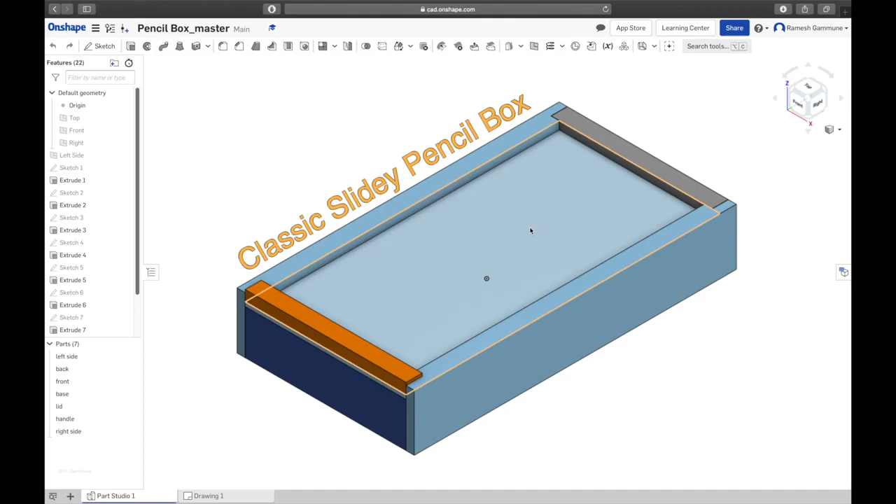In this series we're going to look at making the classic pencil box. It's a bit more advanced than the ones we did before, but still fairly simple. You're going to learn two key new functions: first, how to create an offset plane, as you can see this plane's not at the origin, and second, how to mirror a part. So we've made this once and mirrored it along the origin. That's the main difference, and those are the two key things you'll learn in this tutorial.

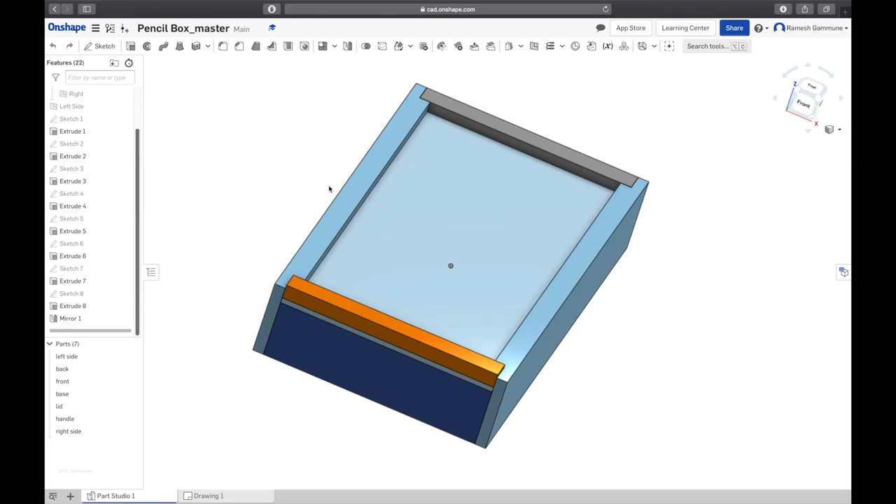You'll also learn how to add new parts, because before we've just been adding features to existing parts. You'll also learn how to do a more complex set of drawings. As you can see here, this is what we're going to end up with. It's actually going to have two pages: page 1 is a complete pencil box, then page 2 is a part breakdown.

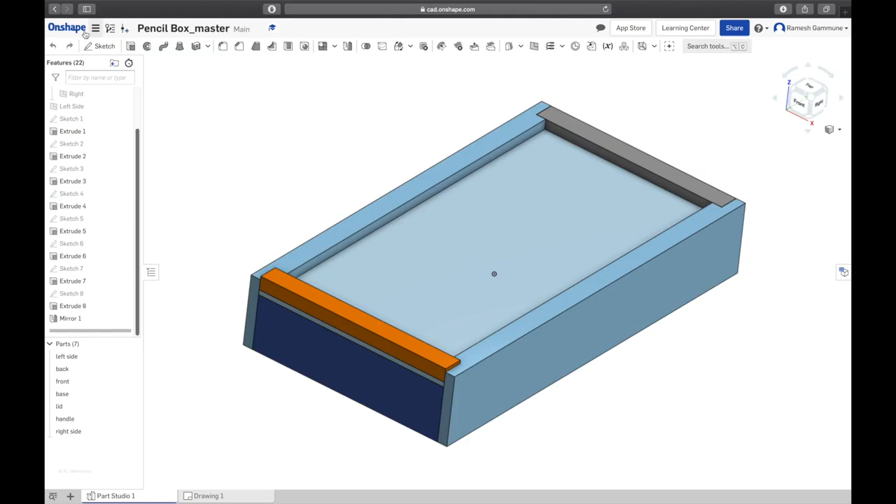Right, so let's get on with it. First thing I'm going to do is go back to my Onshape thing. I'm in a different folder, as you can see, in my Onshape tutorials pencil box folder now. I'm going to go ahead and create a new document and title this pencil box. Hit OK, give it some time.

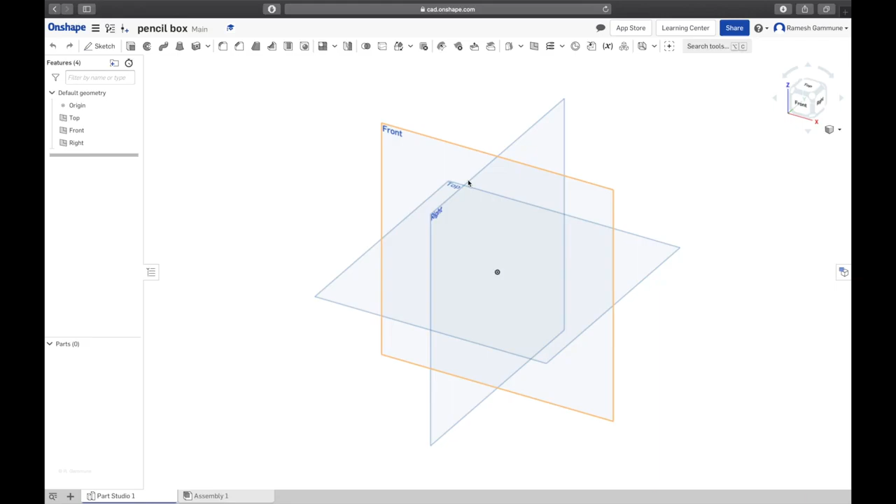And we're here. So the first thing we're going to do is start by making this left side, just that one. We're only going to make one, and at the end we're going to mirror it. So imagine that this pencil box is centered around the origin here, right in the middle. So we've got our top plane that we're looking down on, our front plane, and our right plane.

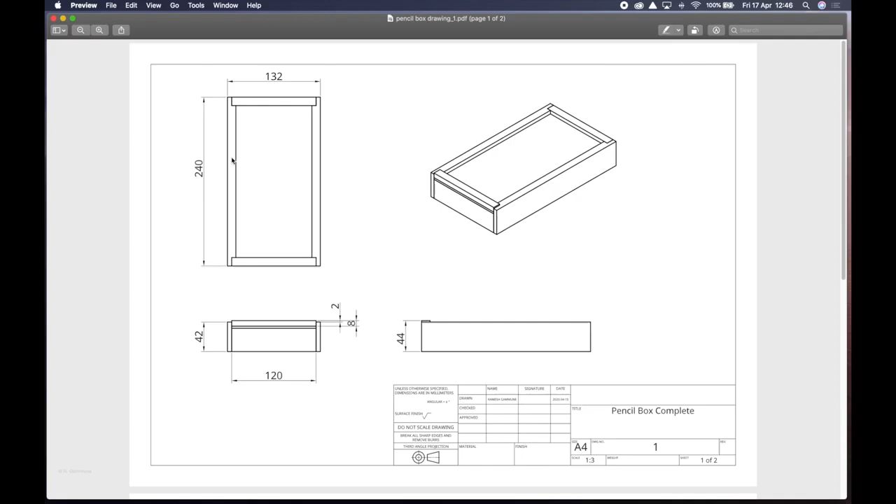So the first thing we have to do is create a new plane offset from the right plane. We spoke about offset sketches, so now we're going to talk about offsetting a plane. Halfway of 132 is 66 millimeters, so we're going to offset one plane off the right plane by 66 mil and create this part on there. Okay, let's get on with that now.

For this I'm not going to need the front plane, so I'm going to hide that. I'm not going to need the top plane either, so I'll hide that too. I'm only going to need the right plane, and we're going to keep the origin because remember we like to anchor our initial sketches around the origin.

So here's what we do. We're going to go up to our features buttons, and right next to that helix you'll see a button called plane. Click the plane, and we're going to base this new plane, plane 1, off our right plane.

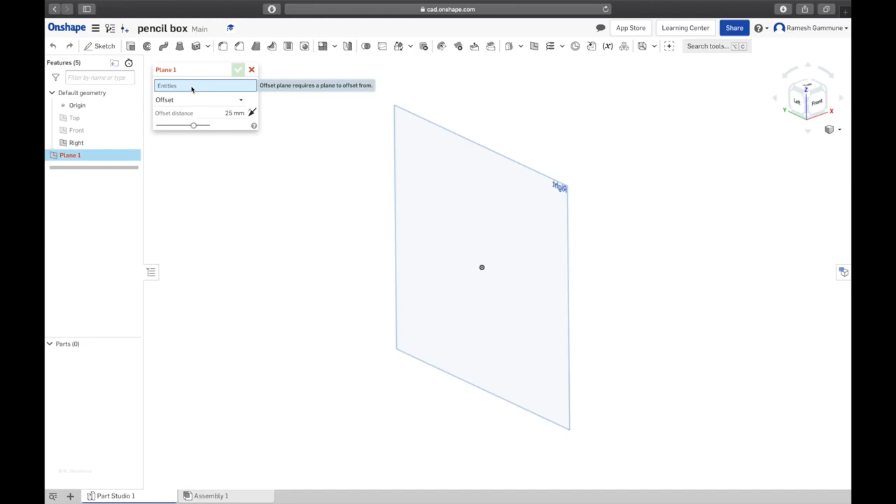First thing you have to do is select a plane to offset it off. You can offset planes off faces or planes, but we don't have any faces yet, so we're going to offset it off this right plane. I'm going to click the right plane, and you can see it's going towards the inside, towards the origin. We want it to go to the left side of the right plane, so we click this opposite direction button and type in 66, which is half of 132. 66, enter. There we go.

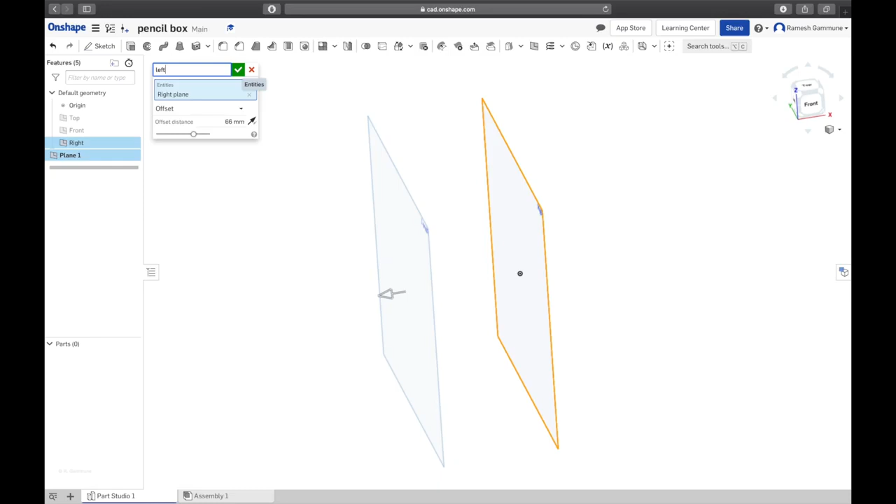And just to get used to good practices, I'm going to change the plane name as well. I'm going to change this to left plane, left offset. There we go, done. Now we don't need the right plane anymore, so we're going to hide that. We're going to keep the origin and start drawing this side.

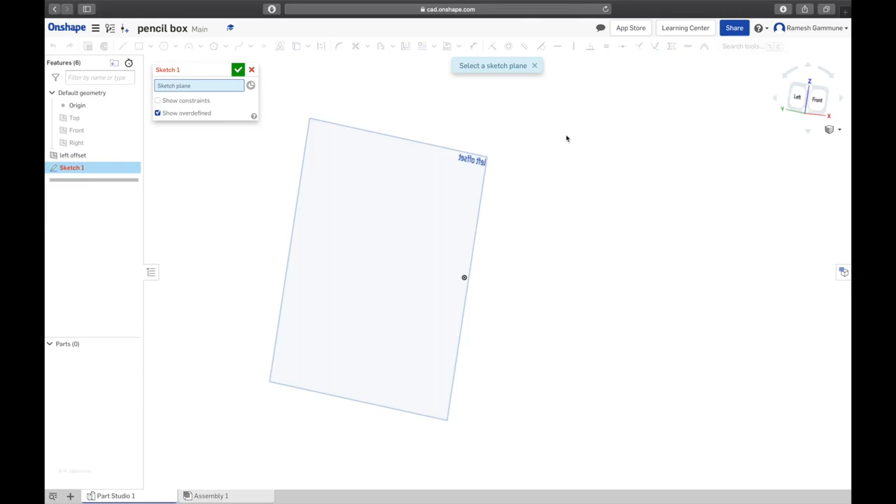And we're going to look at this now, because that gives us what we need to know. Back to Onshape, we're going to open a sketch as usual. I'm going to do this a bit fast now since you've had practice. Select the sketch plane, select the new sketch plane, which is our left offset. You can see that. Right click, whoops, right click, normal to sketch plane.

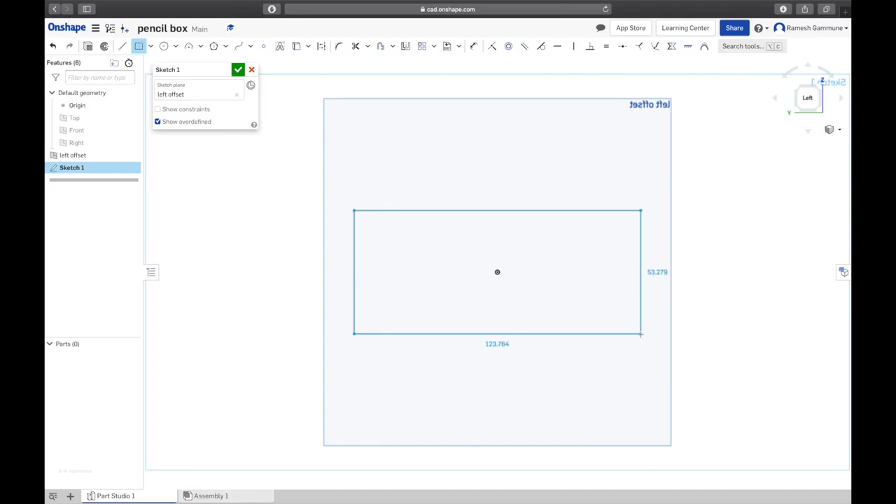Here we go, going to start off with the center point rectangle, base it off our center, and just as before, just draw a random one. Hit escape, and we have to dimension it to 240 by 42. So dimension button, start using shortcuts now, so dimension is D. There we go.

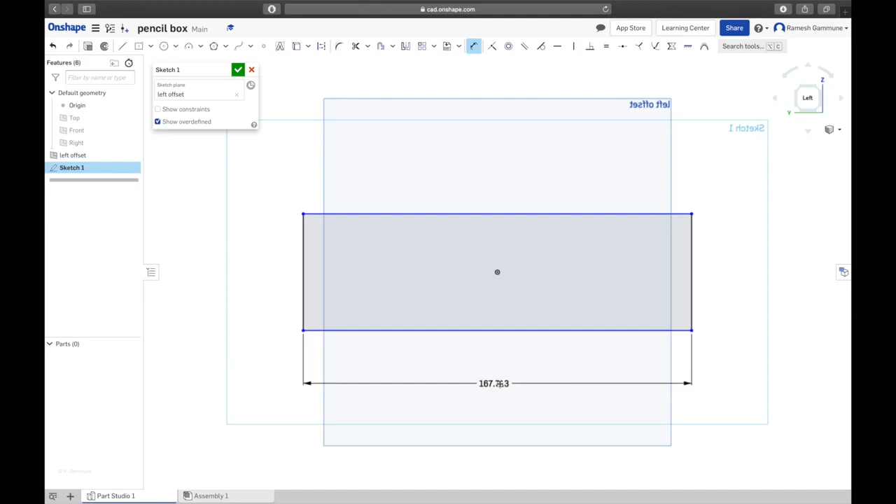Down was 240, enter. We're still in dimension. Do this up, and that's 42. Enter, right? Just double check, 42, 240, accept it, right?

First step done. Next thing, we got to extrude it at 12 mil. Now remember, we placed that plane to the left side of the right plane, so we have to extrude it towards the origin, not out. If we do that, our box is going to end up being 12 millimeters times 2, because it's going to happen on both sides, and it's going to be 24 millimeters wider than we initially intended. So we're going to extrude this towards the origin.

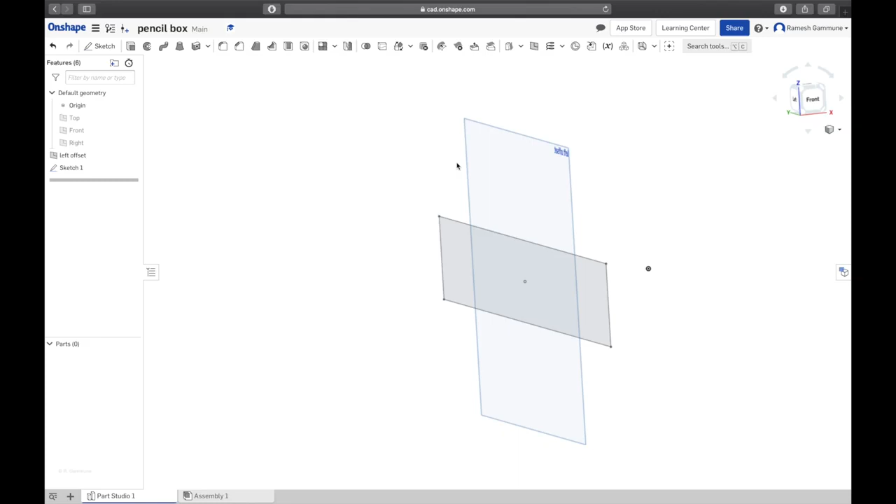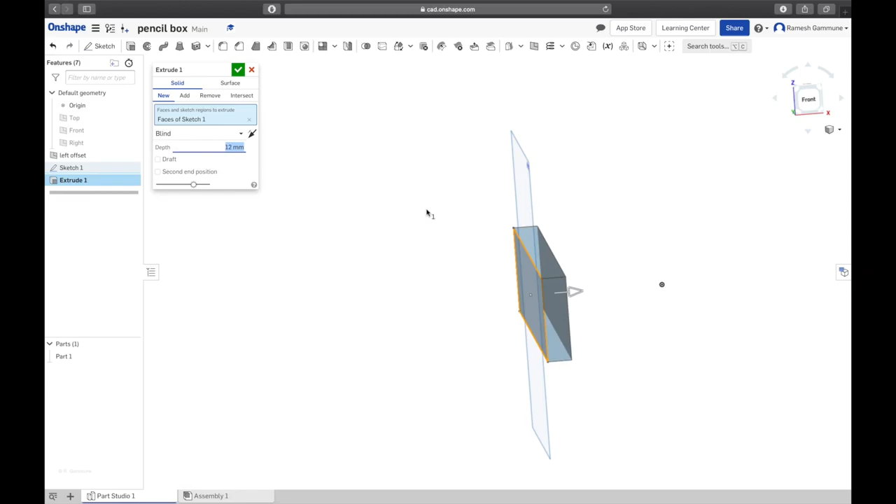Start off by doing that. Right, so back to this. Extrude, click. Instead of clicking it over here, I'm going to click it from here, just for something different. And you can see automatically it goes towards the origin anyway. Change our depth to 12. Enter. Looks about right, looks perfect actually.

And accept it. Cool, that's done. Now, still keep the origin showing, but we can hide the left offset. You can actually right-click on that and go to hide left offset plane and do it that way. And as you can see, it's the same function. Done, one step. The next thing we have to do is cut out these grooves, right?

As you can see, we are going to do these side rebates at the very end. We are going to cut out these long grooves first, so we're going to base it off this side. You can see it's 6 mil down from the edge, 3 mil wide, because that's the width of the saw blade that we use, and that's the actual thickness of the plywood piece that goes in here for our lid. And the bottom one is 6 mil deep and 3 mil wide, but it's not offset from the bottom, it's essentially a long rebate.

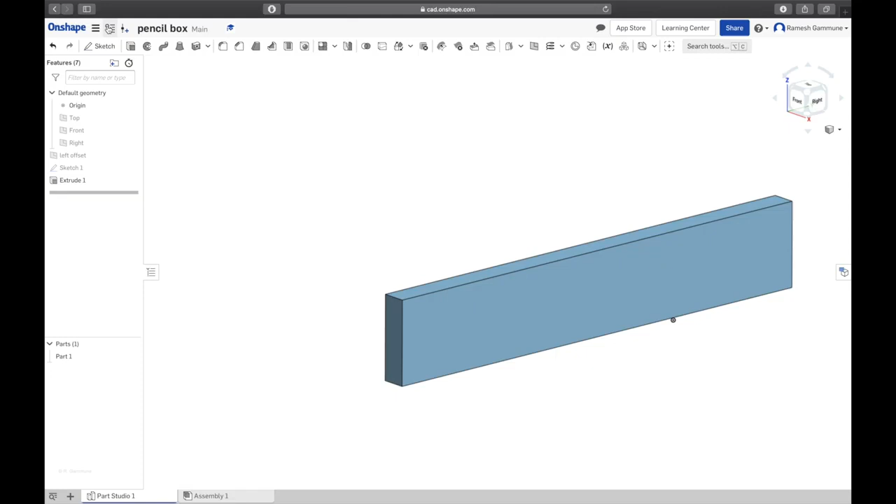Let's go do that, and here we go. Right, back to sketch, make sure you're doing it the right way. The origin is on the right side of the piece. Sketch plane, we're going to select this, make sure it's the correct one. Right click, view normal to sketch plane.

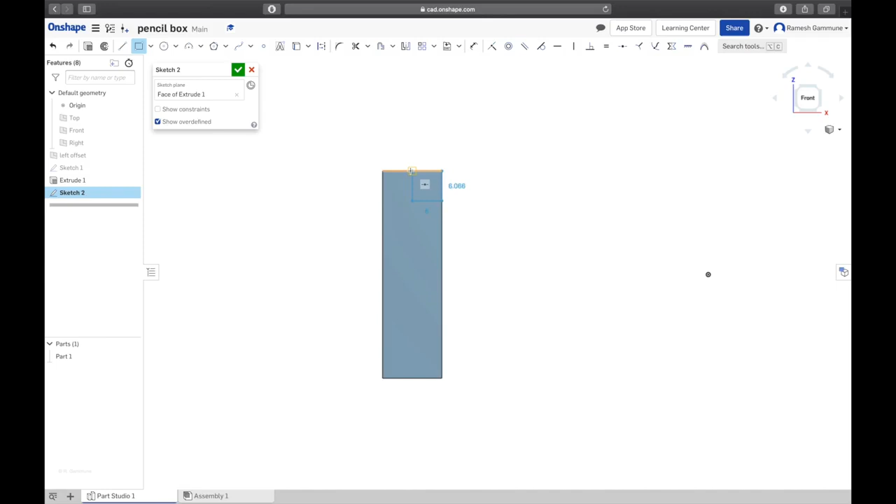Okay, for the top one we are going to use the normal corner rectangle. Just draw a random rectangle, but make sure you don't accidentally lock into the midpoint of that top line. Yes, ultimately it is going to be 6 mil, and that's half of 12, but I just want you to do it a bit, just get used to adding correct dimensions as well.

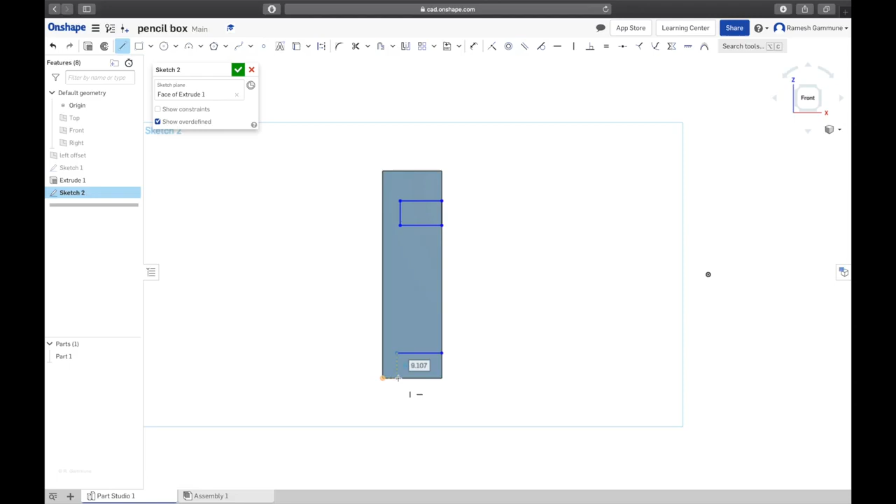Okay, that's done. Escape. The bottom one, we're going to use the line tool, or L, right? Clicked it, same deal, just a random size. And you'd notice that once you click and let go, the tool is still active, just like the rectangle we learned in the last videos. And click over there, hit escape.

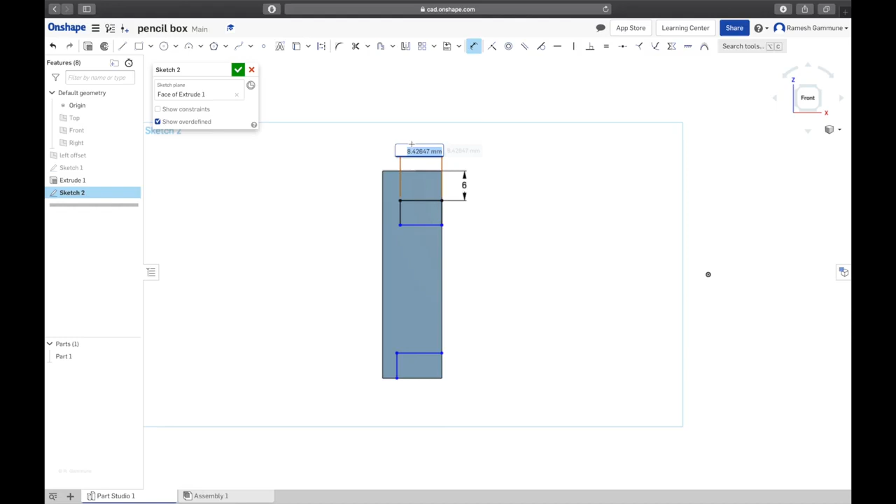Now let's dimension them. Back D, top edge to here. We said that was 6 mil. Enter depth, 6 mil. Forgot to hit enter then. Right, so if that happens, just while you're still in the dimension tool, double click that and you can edit it. Enter. All right.

Width 3, and that is fully defined. It's completely all black now, nothing's blue. Same thing over here, our depth is 6 mil, and the width of that is 3. Enter. Right, yes, we could have done this in 2 sketches, but this is a lot faster.

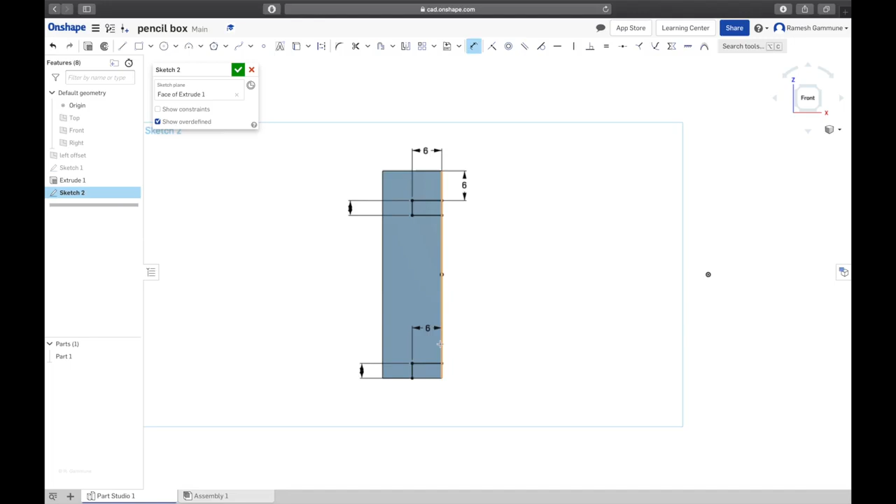Right, we're happy with that. 6, 3, 6, 6, and 3. Double check it with our drawing. 6, 6, 3. Okay.

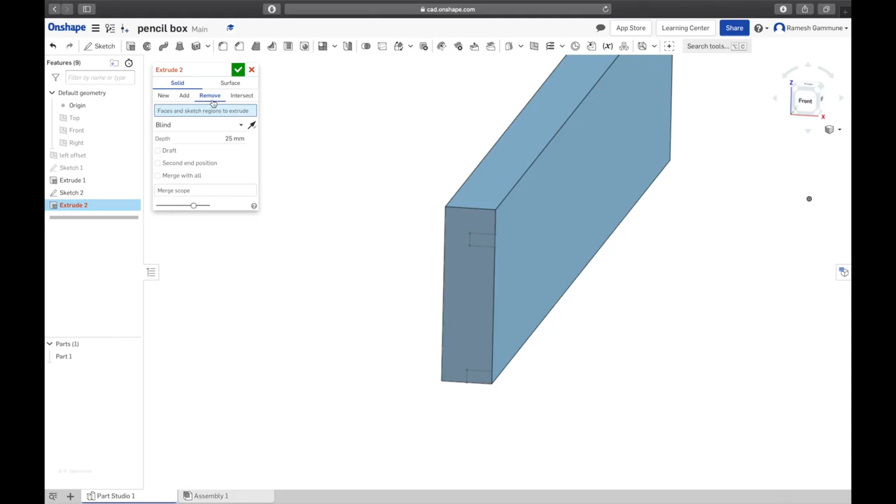And accept the sketch. Now we're going to extrude these 2 sketches, same deal, extrude and remove. Here's where it gets a bit tricky when you pick things. You could accidentally pick the outside, which would remove that and leave the sketches there.

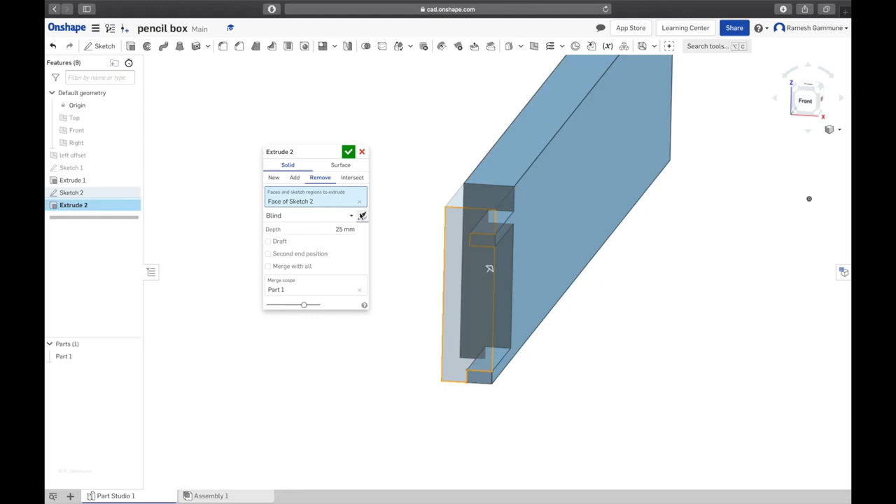What we want is to pick these parts. If you accidentally pick the wrong thing, you can go back to this window over here, move it there and just get rid of them. Pick that, and pick that, and we want it to go through all. Hit and done. Next thing are these 2 rebates.

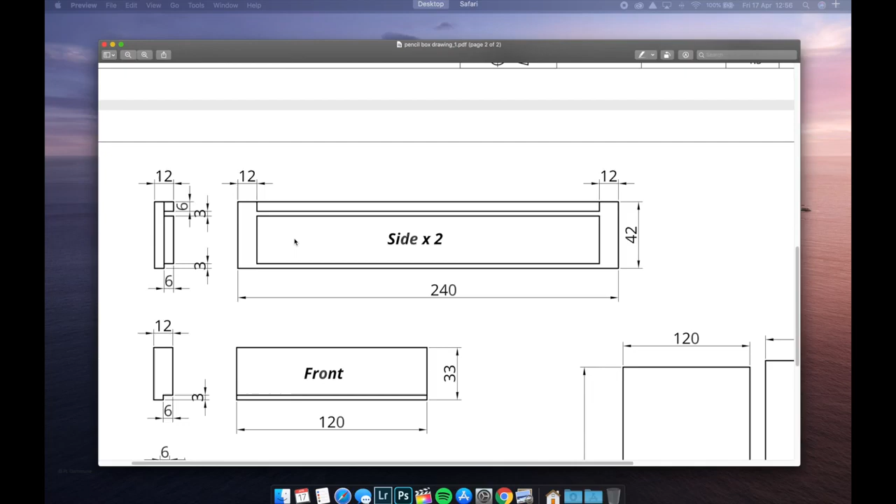We're going to sketch that on this face, so this face over here, that line. We're going to do one and mirror it along the center, and that way you only do one sketch. I'll show you how to do that.

Back to sketch, select the sketch plane, make sure it's the correct one, right click, view normal to sketch plane. I'm going to move that out of the way. First thing we want to do is draw a construction line along the origin. Just draw a normal line first, doesn't matter which direction it goes as long as it is vertical. You'll see that little vertical line next to my cursor, so it's vertical, it'll snap there, there we go.

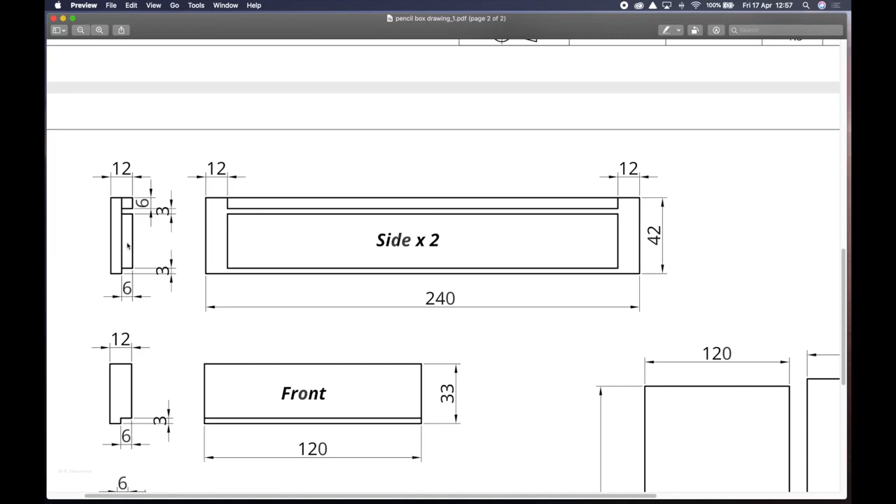Hit escape, click that construction line because we don't want it to register in our extrusions. Click the construction line now and then click anywhere on the thing to get rid of it. There we go, one. The two rebates on either side are 12 mil wide and 6 mil deep, as you can see here. Every cut is 6 millimeters deep in this pencil box.

Let's get back. Corner rectangle, anchor it to the corner, and you'll notice that it doesn't anchor on this bottom line here. That's because it is not on the plane that we're sketching on. So don't leave it here, even though it will work because it's already down to 6 mil. Let's do this properly.

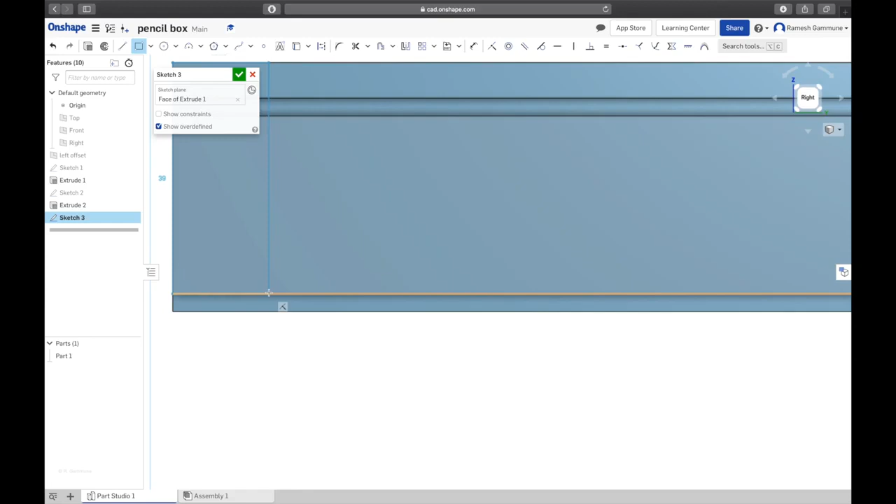Make it a bit bigger. Zoom out. D for dimension. 12, enter. That entire line is 42 because that's the height of our part. Escape to get out of dimension.

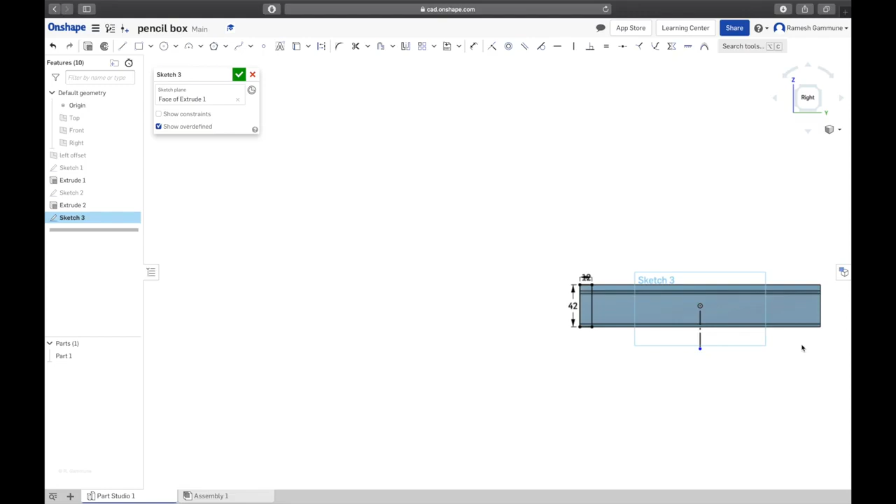As you can see, just get in screen, there we go. Remember, just hit F if it's not doing what you wanted to do. As you can see, we've got one here. We can easily just click another corner rectangle and draw it over here, but I'm going to show you how to use the sketch mirror function.

So this tool over here, next to the offset function, mirror, click that. It says the first thing you do is select a mirror line. We've drawn that line, it is smack bang in the middle. Click it, and then select entities to be mirrored. So now everything you click or select will be mirrored along this.

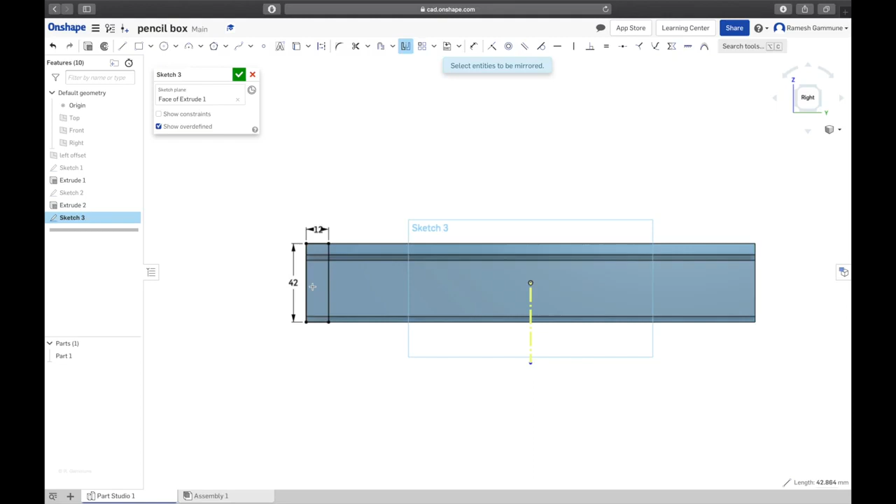So I want this line, you can see, there it is. Top and bottom, there we go. And that one. Perfectly mirrored. Hit escape to get out of that function, because if you're still in here and you start clicking elsewhere, it's just going to keep mirroring those. We don't have anything to do so, but, you know, just do it. And escape, happy with that.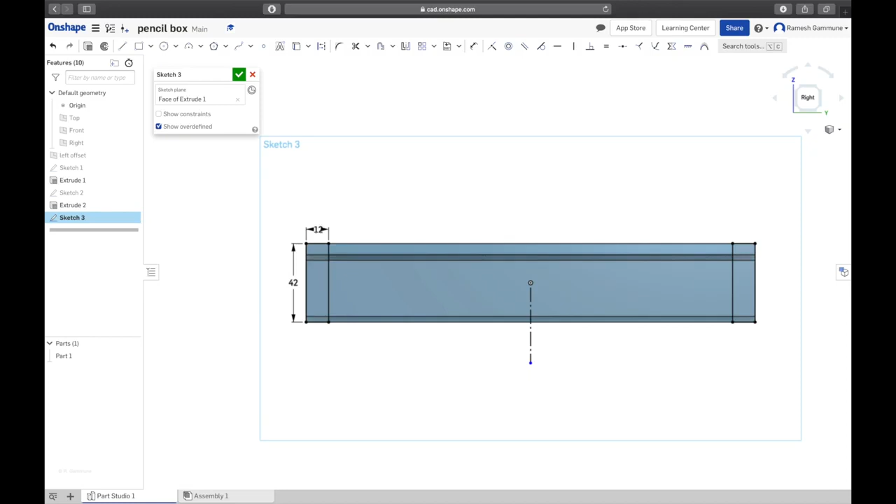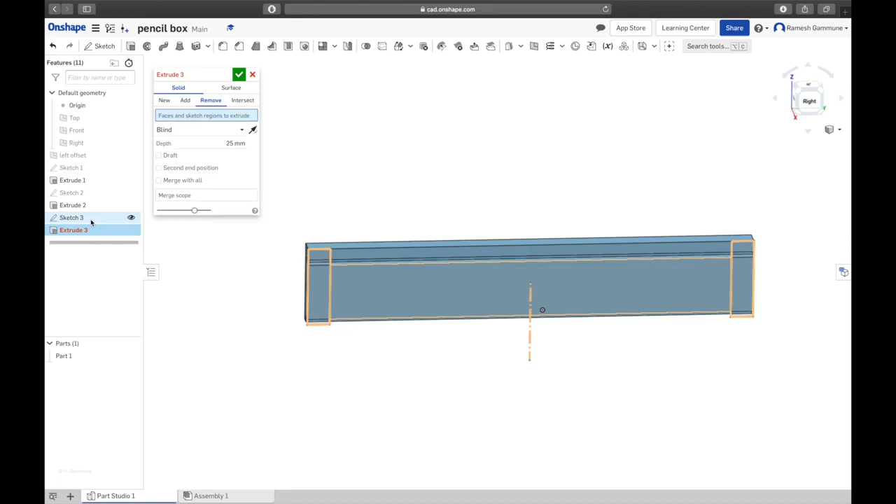Done, and we have to extrude cut these now, so remove. It's going to be tricky to pick all of these, but because we drew closed sketches, we can just select sketch 3 and it will remove it for us. We wanted to go that direction, but we want to only go down 6 mil. There we go, and click. Done. Okay, that's our left side done.

Because we're going to have a lot of parts and we want to know which parts are which, it's good practice this time to name the actual part. So if I click this, you'll notice that that part is all highlighted, and I can hide or show the part. So it says part 1 now, I'm going to name this left side. So right click, rename, just type in left side and enter.